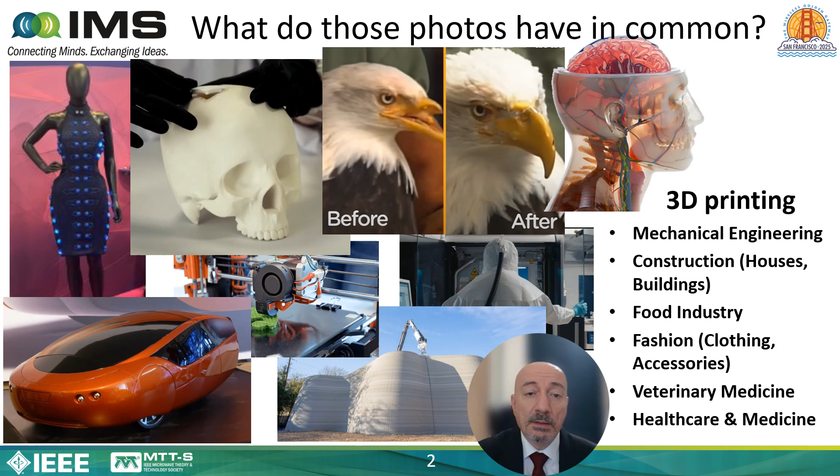Here you can see how many applications of additive manufacturing we can have. It has been used in a wide range of fields, including mechanical engineering, construction of houses, the food industry, fashion, clothing, accessories, veterinary medicine, and medicine for humans.

Of course, in this presentation we are interested in the application to microwave components. It is clear that this technology was not properly born for this area, so we have to understand how to exploit this technology for microwave components.

During this presentation, we will see the importance of selecting the right additive manufacturing technology according to the application, because there are so many different additive manufacturing technologies that it is important to select the best one in our case.

I will also show the importance of an additive manufacturing oriented design, because despite this technology allowing a wide variety of shapes, it doesn't allow all possible shapes. So it is better to have in mind the technology we will be using for manufacturing during the design.

We will also see the importance of post-processing. We will look at two different additive manufacturing technologies in particular: stereolithography, which produces plastic objects, and selective laser melting, which instead produces metal objects directly.

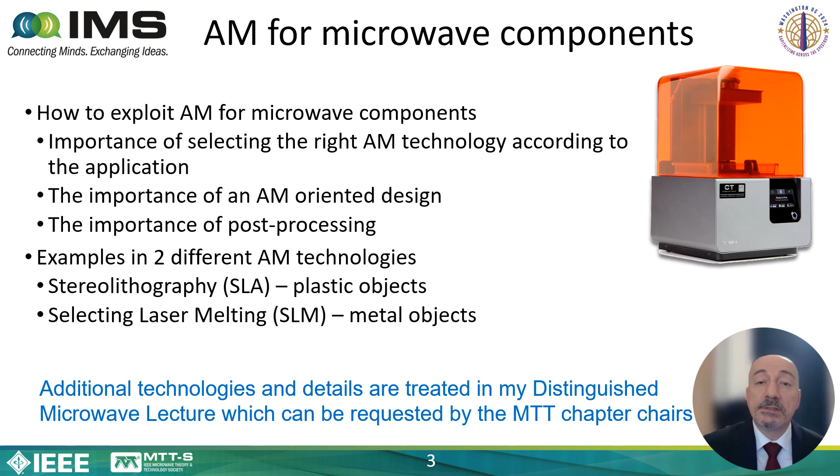But what is the main difference between additive manufacturing technologies and classical subtractive technologies, such as the traditional drilling technique? In this case, we have a block of material and we remove part of the material by using a drill in order to obtain the desired shape.

In additive manufacturing, instead, we have a completely different approach because we add material in order to obtain the desired shape. We manufacture the object layer by layer.

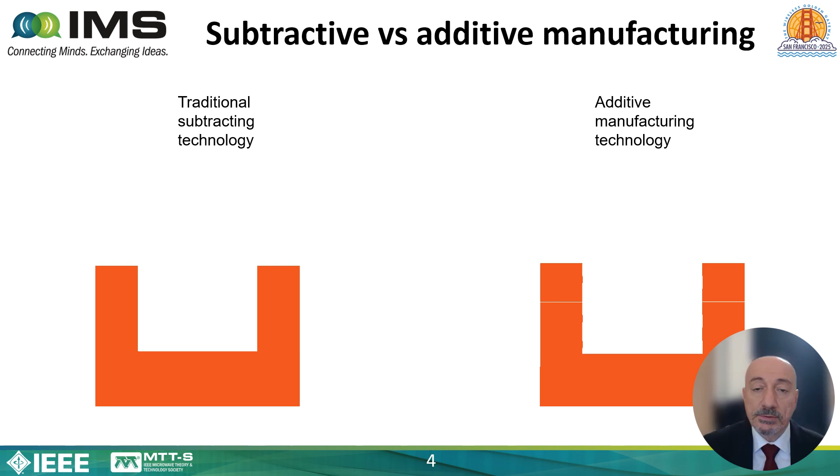We can add material by using so many different technologies. We can solidify liquids by using a laser, or we can melt powder and then solidify it in order to obtain the desired shape, and so on. So we have a lot of possibilities.

There are so many different additive manufacturing technologies that in 2010 the American Society for Testing and Materials decided to categorize all technologies into 7 categories: vat photopolymerization, material jetting, binder jetting, material extrusion, powder bed fusion, sheet lamination, and directed energy deposition.

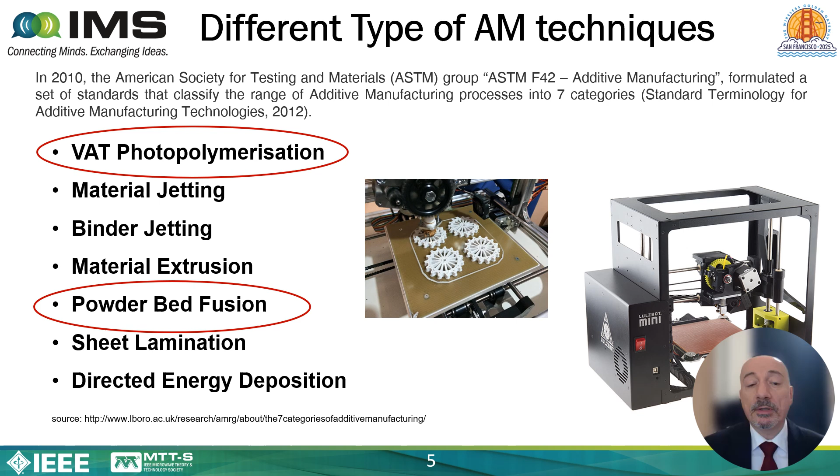This presentation is very short, so we cannot cover all of them. We will see two examples: one in vat photopolymerization and the other in the powder bed fusion category. Let's start with the vat photopolymerization category.

Technologies in this category use photopolymer resin, which is cured and hardened by using an ultraviolet laser. Here we have the real machinery and here we have the scheme. This machinery consists of a vat, according to the name of the category, which contains liquid resin.

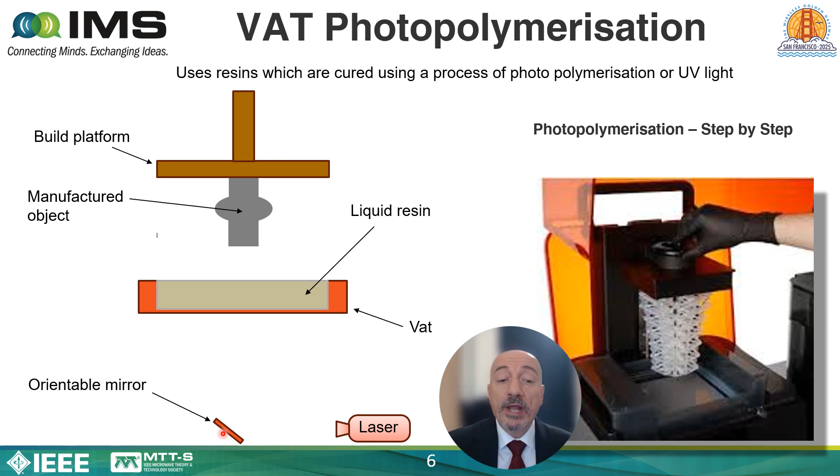Then we have the object to be manufactured, which is attached to the build platform. And then below the vat, we have an orientable mirror which redirects the laser beam.

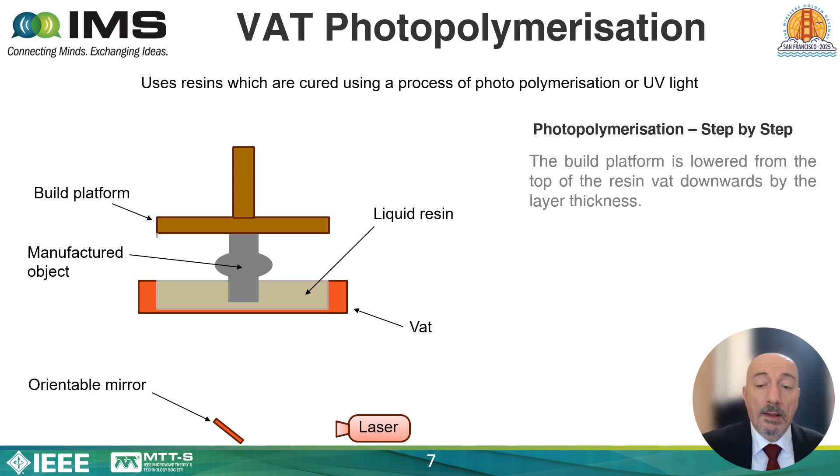Then the platform is lowered, immersing the object being manufactured in the resin until leaving a small gap with the vat. At this point, the orientable mirror redirects the laser beam to obtain the new layer of the object, which has been obtained by hardening the photopolymer resin.

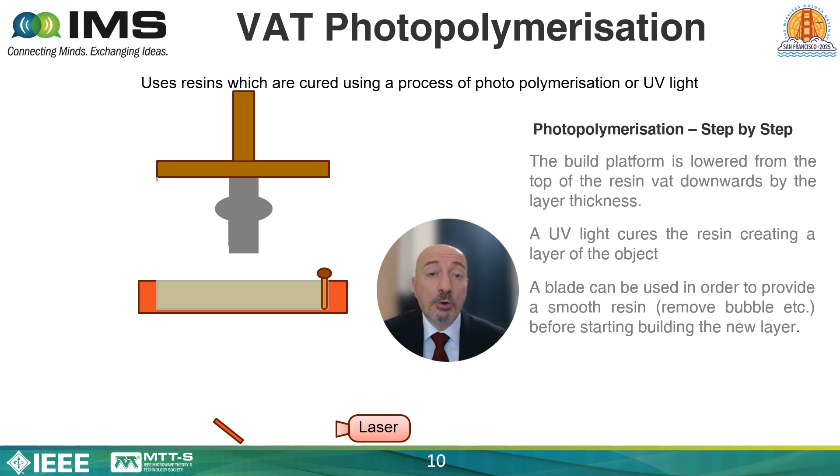After that, usually a blade is used to provide a smooth resin surface. We do this to remove any possible bubble that may have formed when we immersed the object into the resin, because we must avoid air bubbles inside the resin, as they could result in defects when the next layer is created. After that, the process is repeated layer by layer until the manufacturing is completed.

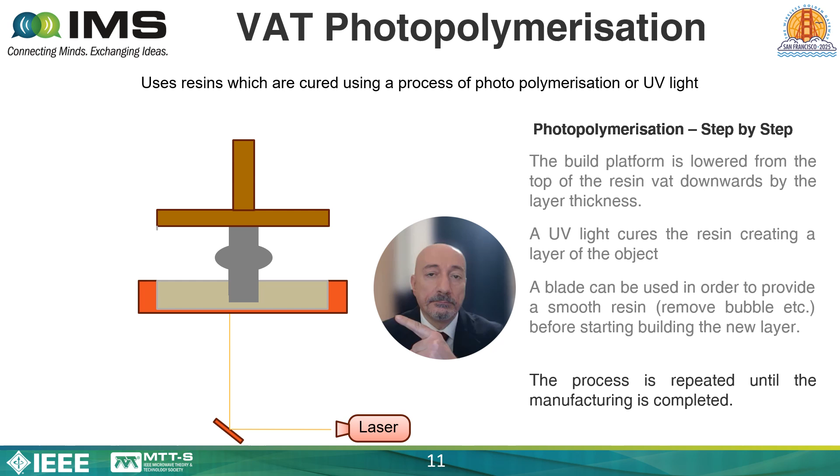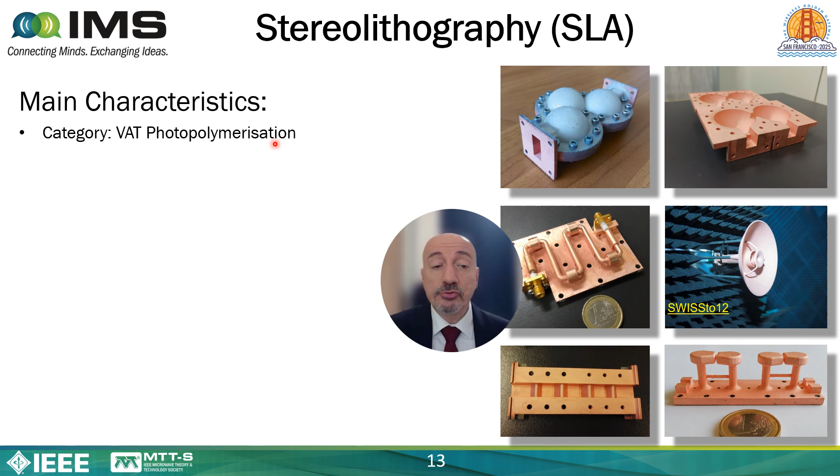Here we are adding another layer. Now let's start with the first additive manufacturing technology, the stereolithography. This technology falls in the category of vat photopolymerization. Indeed, we have a vat of liquid photopolymer resin that is hardened by using a laser.

This technology is quite versatile. Actually, all additive manufacturing technologies are quite versatile because they allow new classes of components with non-conventional geometries, like you can see here. If we want to manufacture these two components by using traditional milling techniques, you cannot manufacture them in just one step. You need more steps. Here instead you can manufacture in one shot.

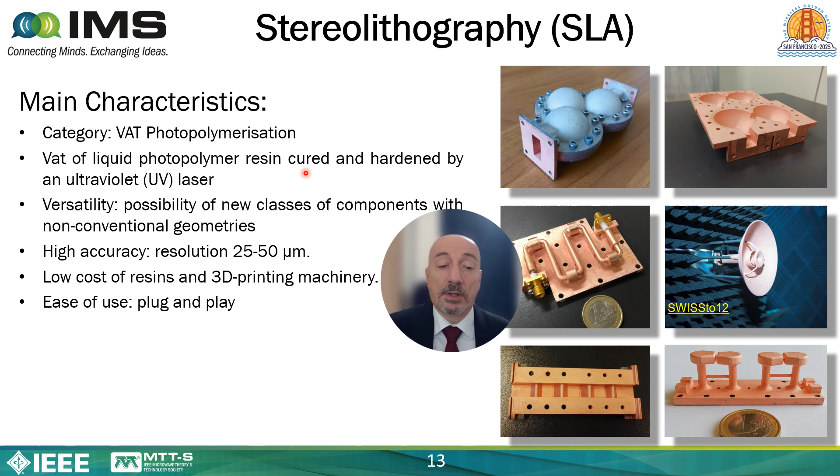The accuracy is also quite high, since its resolution ranges from 25 to 50 micrometers. It is also a low cost technology because the resin is quite cheap and the 3D printing machinery is not so expensive. You can buy a 3D printing machine for about $2,000, which is not too much, especially for a laboratory. It is also easy to use - this is plug and play, which is not common in additive manufacturing technologies.

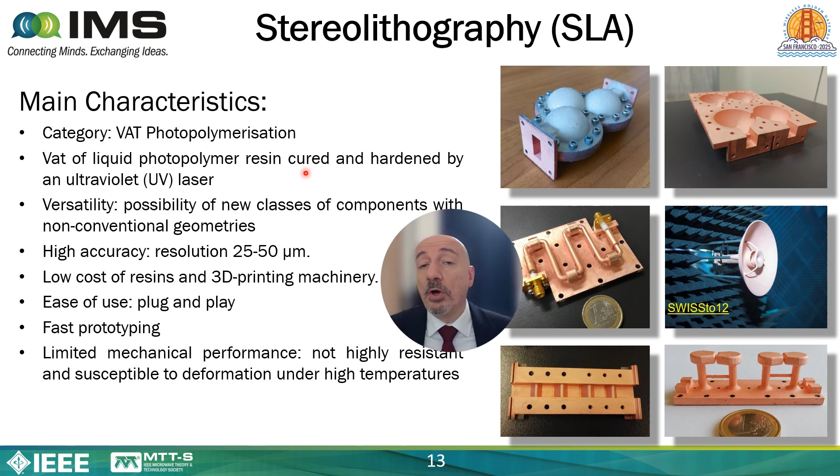It allows fast prototyping, but unfortunately we produce plastic objects. So plastic objects have limited mechanical performance. They are not highly resistant, and they are also susceptible to deformation under high temperature.

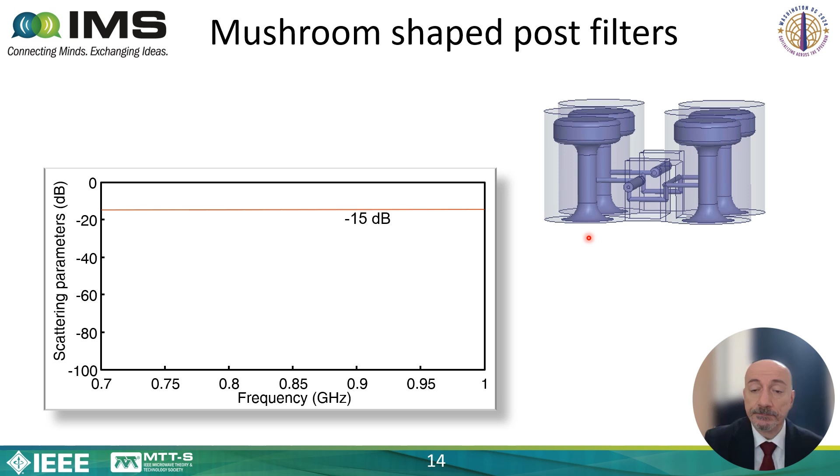I would like to show how this technology works by using this filter. This is a cavity filter loaded with mushroom-shaped posts. In addition, we have a complex wire network, as you can see here, and this network connects all the posts. This structure is not very easy to manufacture using traditional manufacturing techniques. This network is also important because, for example, if we change the height of this network, we can change the filter band.

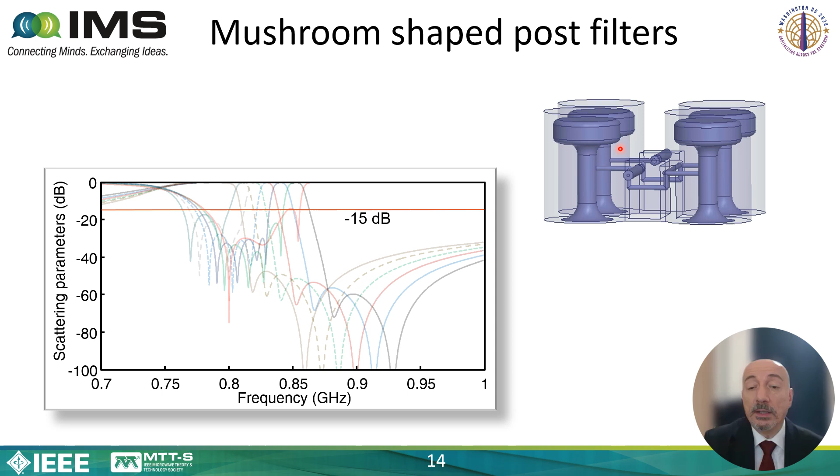But if we change this part or this part, we can also change the position of the transmission zero. And with the shape of this network, we can reshape the response. So it is very important to be quite accurate in manufacturing this part. For that reason, we select stereolithography as the technology for manufacturing.

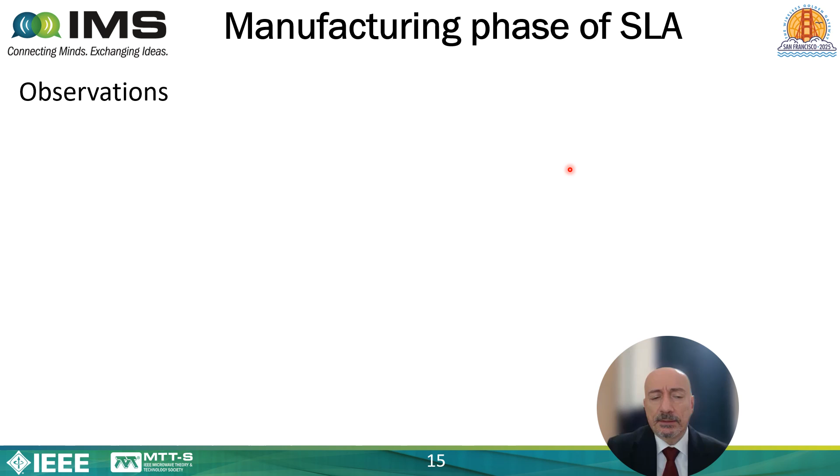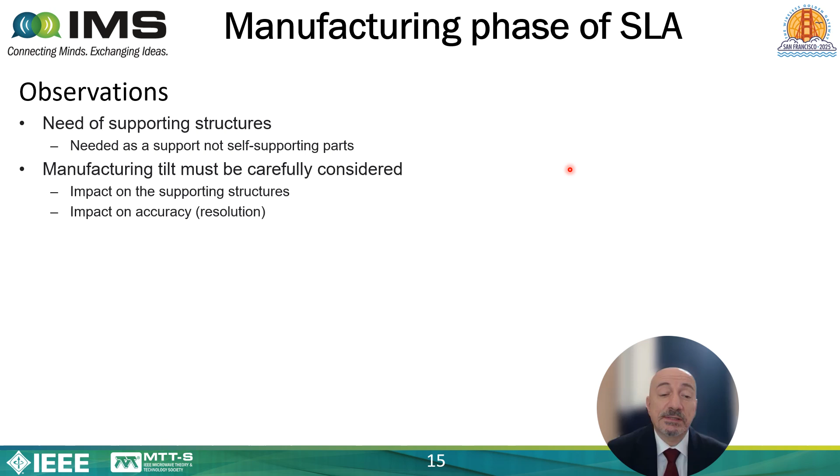Before showing how to manufacture it, let me start with some observations. First, there is the need of supporting structures in general for additive manufacturing. This is needed because there could be parts of the manufactured object that are not self-supporting - I will explain later what I mean. Another important part is the tilt during manufacturing, because this impacts the supporting structures and also impacts the accuracy, the resolution of the object. We will also see the importance of additive manufacturing oriented design.

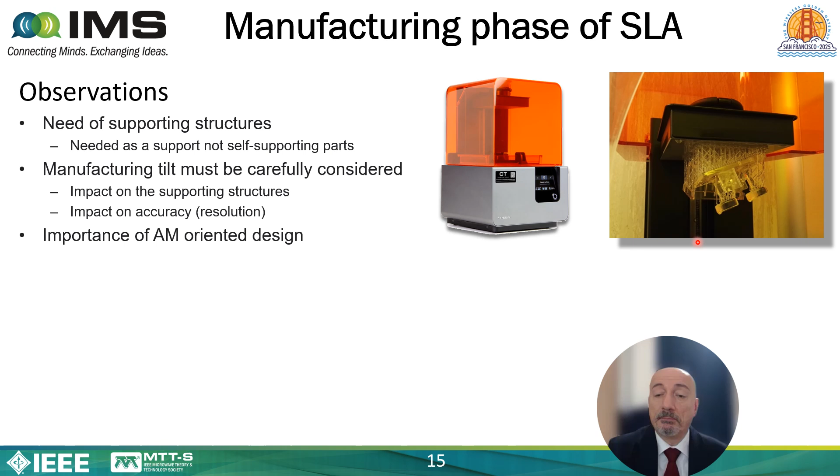This is the bottom of the filter after manufacturing. As you can see here, we have a certain tilt angle, and we selected this in order to minimize the supporting structure, the supporting structure you can see here. Of course, all those supporting structures should be removed after manufacturing.

But why do we need this supporting structure? Let's suppose we have to manufacture this layer. Consider that the manufacturing of this object starts from the top and then proceeds through the bottom. When we start manufacturing this layer, in this part we have no possibility to attach it to the previous one because there is no previous layer. For this reason, we need this holding structure to attach this layer. Of course, this is not necessary when we manufacture this layer here, because it can be completely attached to the previous one, since the previous one exists.

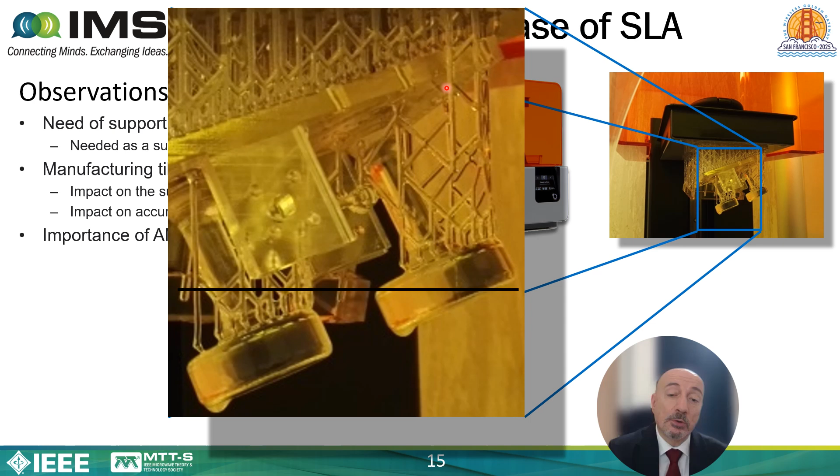I want to show you that thanks to the tilt, it is not necessary to add further holding structures here, because we can attach all this layer to the previous one. So, as you can see, this is why the selection of the tilt is very important and impacts the resolution, first of all, but also the number of holding structures.

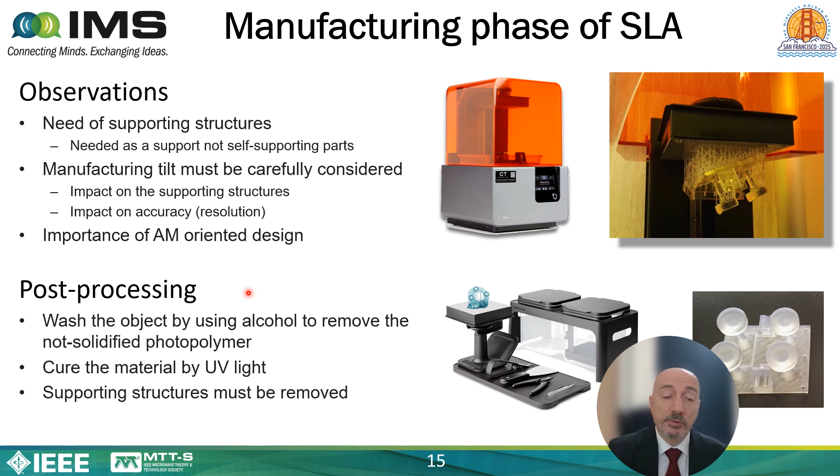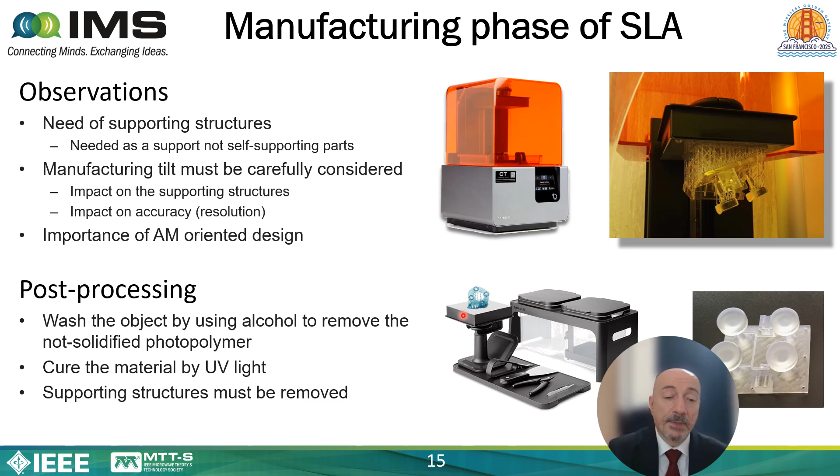With this technology, we also need some post-processing, which consists of washing the object using alcohol, because we have to remove the not-solidified photopolymer. When we finish manufacturing, there is this liquid that adheres to the manufactured object and makes it very sticky. So we have to polish and clean it, and then it is better to cure the material using ultraviolet light in order to make it harder, and then the supporting structure must be removed.

In addition to that, for our filter we have specific post-processing. This specific post-processing is for microwave applications. Let me explain it better.

The material, the plastic produced by this technology, could in theory be used as the dielectric material, but unfortunately the loss tangent is quite high. So if you use it as the dielectric material, you have a lot of losses, and usually this is undesired.

When you are working with microwave components, instead of using it as the dielectric material, we use this just as a support for the metallization in order to shape the metal. Our filter is considered in metal, so this means we need to metallize the surface of this plastic.

To do that, we use electroplating. The electroplating consists of two steps, at least as we implemented it. In step one, we spray the surface with silver paint to make it conductive, because otherwise the electroplating doesn't work. But once the surface is conductive, you can electroplate it.

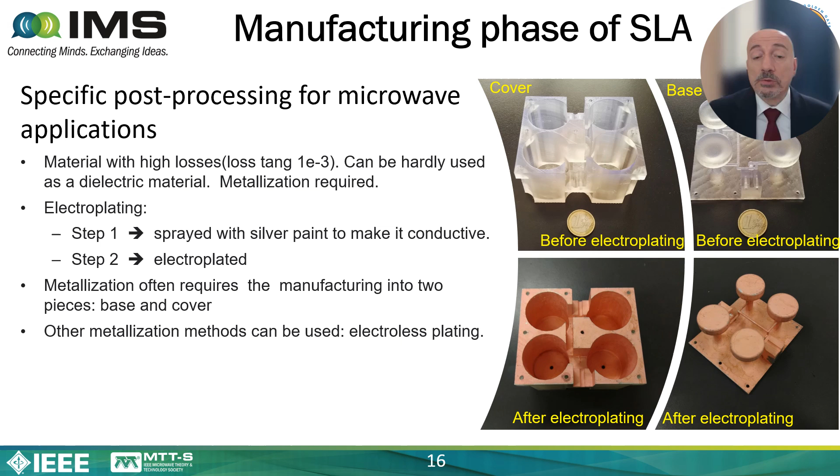Of course, other metallization methods are also possible, for example electroless plating. In this case, by using electroless plating, you can also obtain monolithic manufacturing. That would be very interesting because monolithic manufacturing has so many advantages.

You don't have to screw the parts together after manufacturing, you make it lighter, and you don't need to assemble and risk higher losses, because the ohmic contact when you join two parts is not so good. So there are a lot of advantages to monolithic manufacturing.

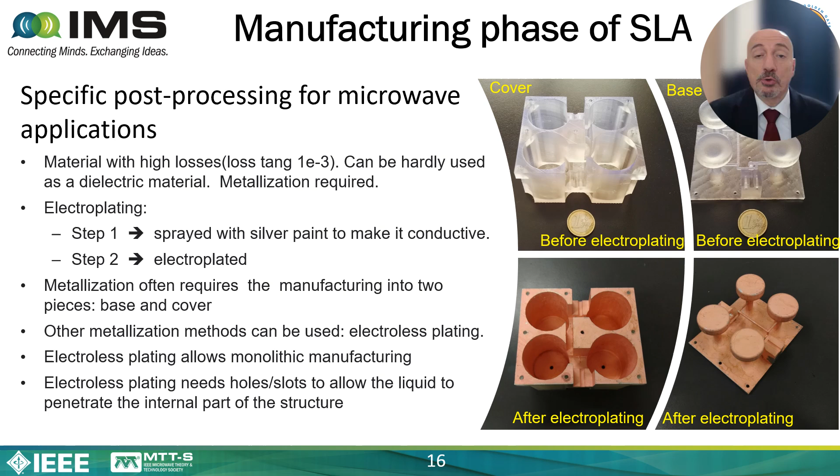This is in part possible by using electroless plating, but unfortunately electroless plating needs holes in the structure in any case, to allow the liquid to penetrate the internal part. This is a disadvantage. So there are some advantages but also disadvantages, because through this aperture you can also have leakage.

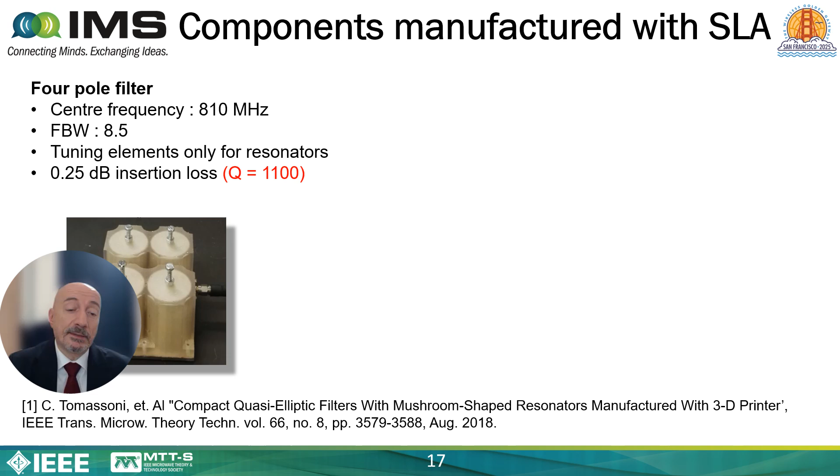What I want to point out is that thanks to the non-conventional geometry, this filter is quite small, and we also have a transmission zero that can be easily controlled. This is obtained thanks to the versatility of this technology.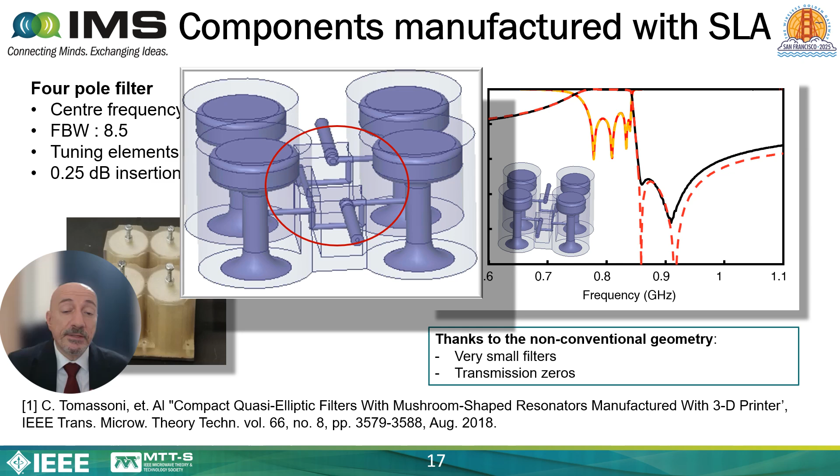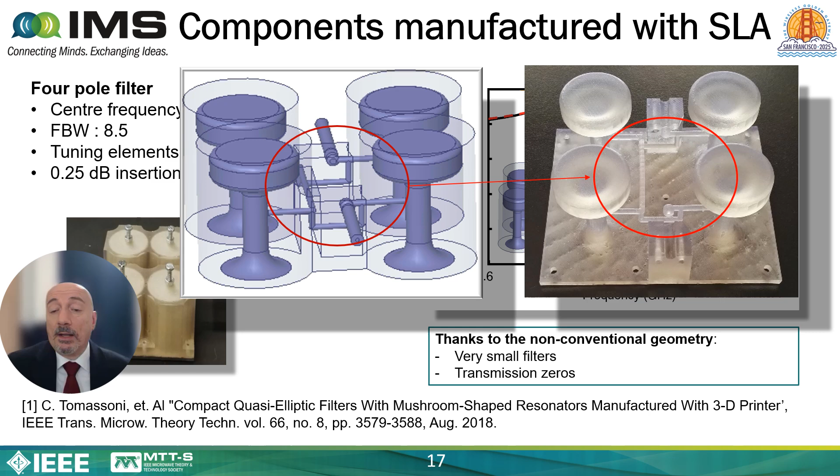This is the complex structure we have to manufacture, and this part, as you can see here, has been manufactured in only one shot. This is very important, because if you were using a traditional technology for manufacturing this filter, for example drilling, it would be impossible to manufacture this in one shot.

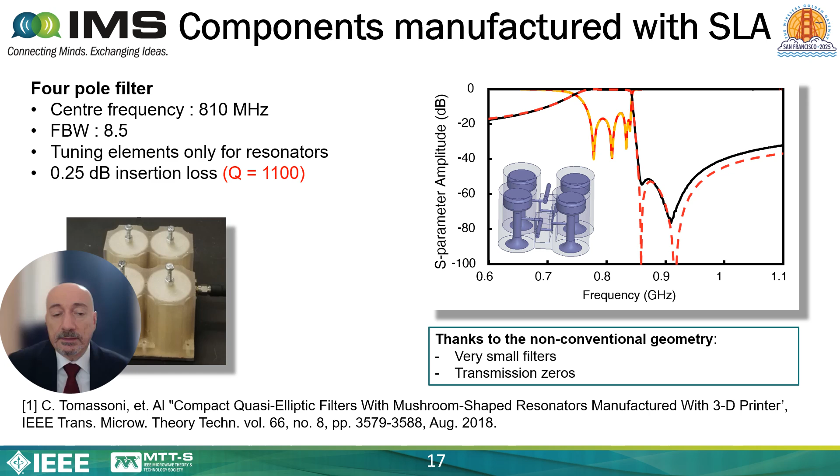You would have to start with the base, then add all the posts, and then attach this complex network. In the end, it is much more difficult, and there are problems with accuracy. So in this case, this technology allows for a lot of advantages.

I would also like to show you this Magic-T manufactured by using SLA. This is not from my group, this is from another group, and you can see more details in this paper. What I want to show here is that this structure is obtained by using electroless nickel plating, and indeed they were able to manufacture it monolithically.

This is very interesting, but unfortunately, in order to allow the liquid to go inside the structure and allow the metallization, they had to put a lot of slots in these waveguides, as you can see.

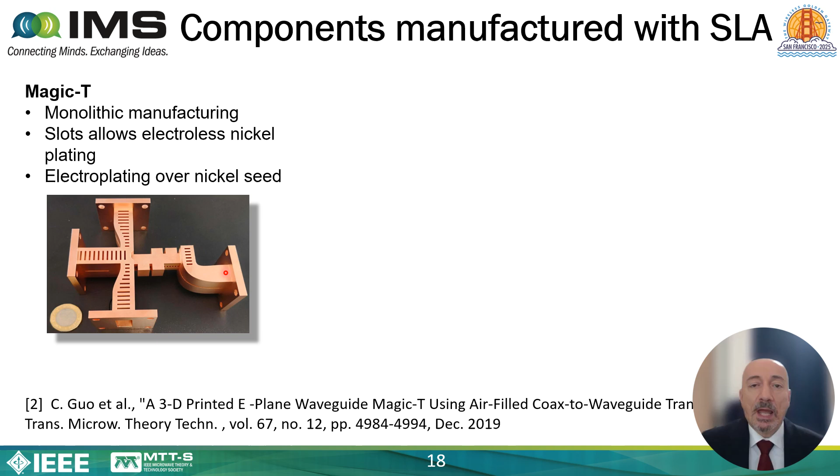And this is a disadvantage. So you have the advantage of a monolithic structure, but at the same time you have the disadvantage of slots.

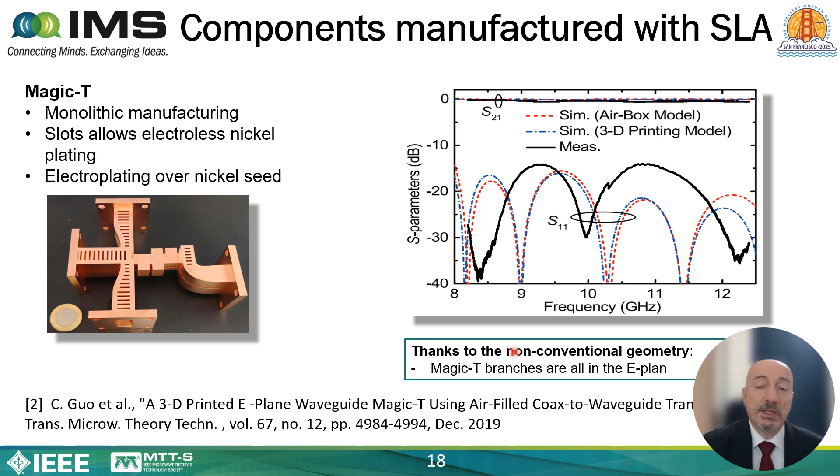Okay, this is the results, but in our case it is not important. I can also point out that this is a non-conventional geometry for Magic-T, and also in this case they take advantage of the flexibility of the stereolithography technology.

And now let me introduce another category of additive manufacturing technologies, the powder bed fusion.

In this case, we use a laser or an electron beam to melt and fuse material powder together. It is possible also to use an electron beam, but for our application it is better to use a laser because usually the object is much more accurate when we manufacture it by using a laser.

How does this category of technologies work? In general, we have a powder bed, as you can see here. The powder bed in the real machinery goes here.

Now there is no powder actually, but it goes here. And then the manufactured object is buried inside this powder bed.

Then we have a platform. You can see here the platform. This one is the platform in the real machinery. And then above this, we have an orientable mirror that redirects the laser beam.

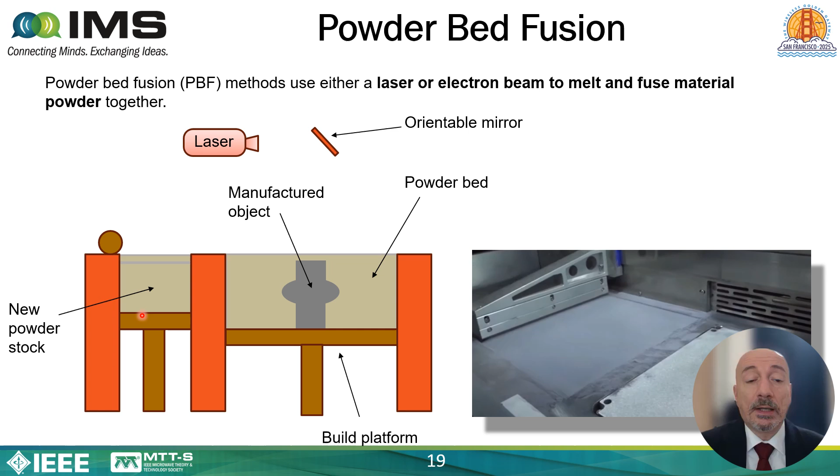Finally, we have also a so-called new powder stock and a powder roller. The new layer of the object is generated by selectively melting the small layer of powder above the object.

Of course, the powder is melted by the high-power laser, and then the new powder platform is raised.

While the build platform is lowered, the powder roller pushes the powder to generate a new powder layer.

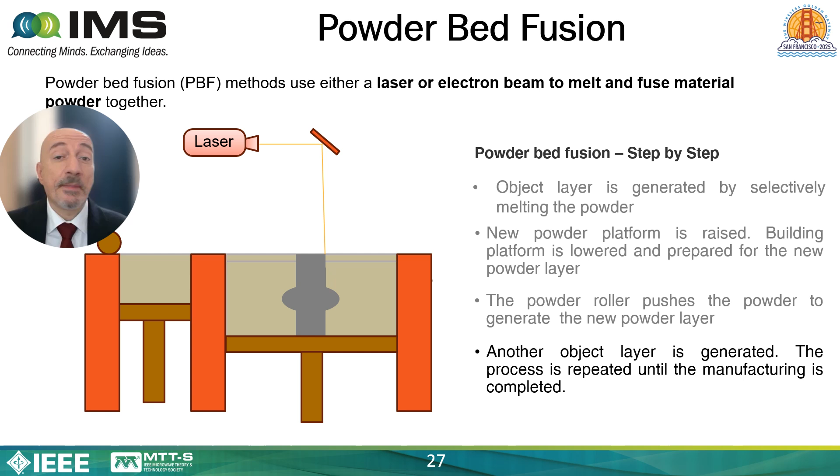And then it comes back, and we are ready again to generate a new layer. The process is then repeated layer by layer until the manufacturing is completed.

And let's now see a technology that falls in this category, in the category of powder bed fusion we just described. This is the selective laser melting.

In this case, we have a metal powder and a laser to melt and fuse the material powder together. This means that we obtain directly a metallic object, and this results in high mechanical performances.

And we also can manufacture it monolithically, and this is another great advantage because in this case, we don't need to manufacture the object in two halves because we don't need to metallize the internal part.

So we can manufacture directly monolithically, and this is an advantage from the point of view of the weight of this object, because if you manufacture in two different parts, then you have to assemble them together, and you need flanges, screws, and this increases the weight of this object.

And then when you attach two metallic parts together, you also risk that ohmic losses increase the losses of the components. So this is really an advantage, the monolithic manufacturing.

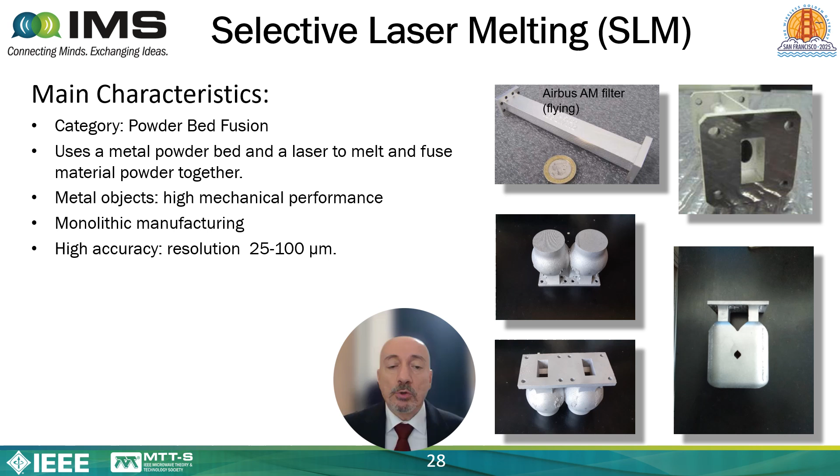The accuracy of this technology is quite high, by the way, because the resolution ranges from 25 to 100 micrometers. Unfortunately, the cost is relatively high.

And it is not plug and play, so you need an expert operator. Indeed, several parameters must be set on the machinery. For example, you have to select the power of the laser.

If you use too high power, you risk creating a large fuse spot, and this results in poor resolution. If the power is not enough, instead, the powder particles stick to each other without fusing.

This results in a fragile component and a component with higher losses. So there are a lot of things to be said, and by the way, the metal powder is also dangerous.

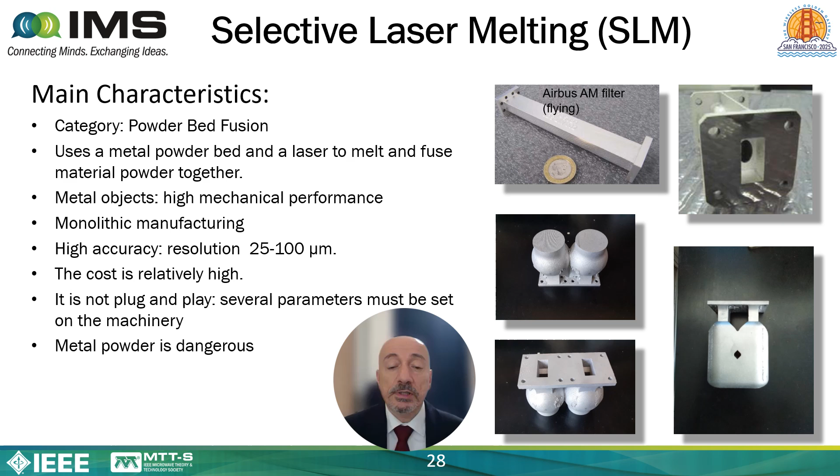The metal powder is very fine, and it may explode. It is also dangerous because it can be inhaled, and it is dangerous for the health. That's why the operator wears this strange suit in order to avoid inhaling the metal powder.

This is a video courtesy of Swissto12, a company that works in this area with which I'm collaborating. And as you can see here from this video...

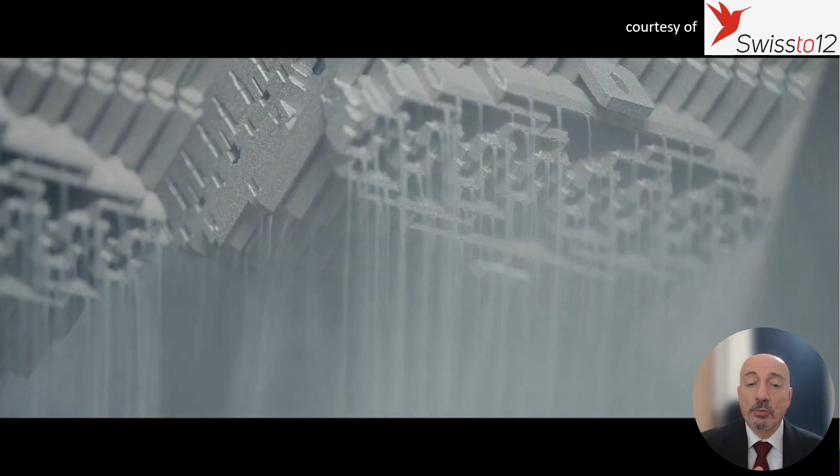The laser creates the object from the powder bed. This is accelerated, of course, and then you have to remove the objects from the powder bed to clean it better.

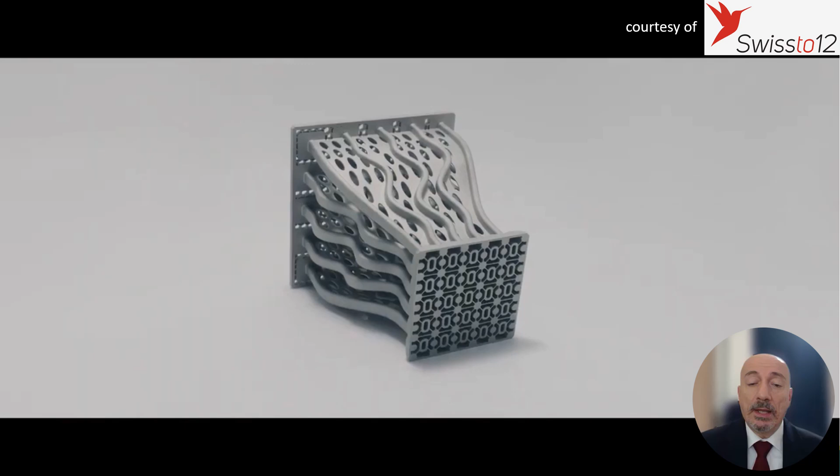But at the end, what you obtain is a complex component that is monolithically manufactured. So this is a big advantage, of course.

Spherical filters are not a novelty, but here the novelty is that we use a high order mode, and this means that we use that in order to strongly reduce the losses.

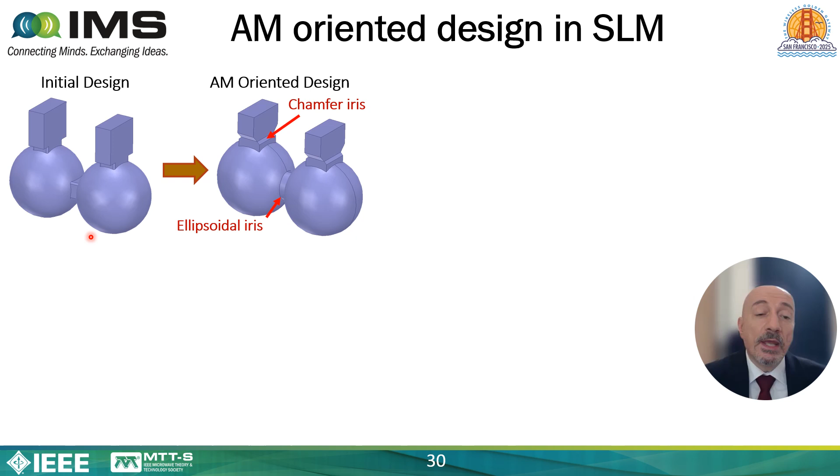By using this new shape, this is a self-holding shape, so it is not necessary to insert a holding structure inside the aperture. Here instead it is necessary to insert them in order to hold this horizontal wall. The fact that we removed the internal holding structure makes this manufacturing possible. Otherwise, it is very complicated to remove the internal structure after the filter has been manufactured.

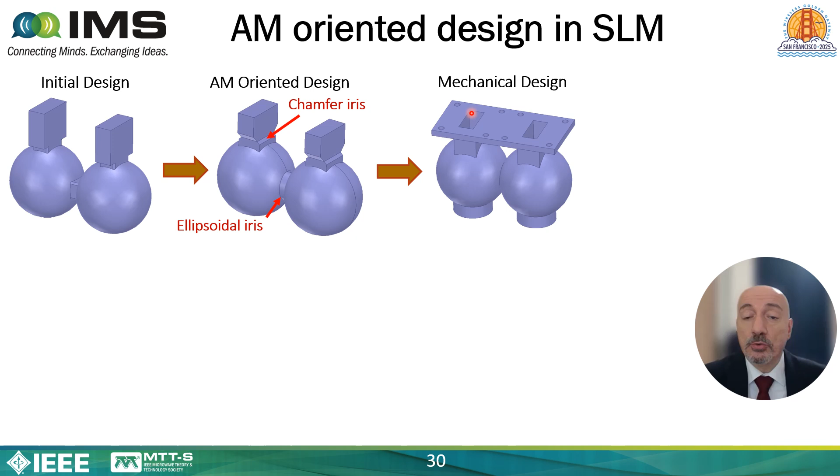The next step is to pass toward a mechanical design in which we added the flange in order to connect the filter with the input and output waveguide, and then we also added two pedestals in order to maintain this more stable during the manufacturing, which follows this direction. This is the orientation of the manufacturing.

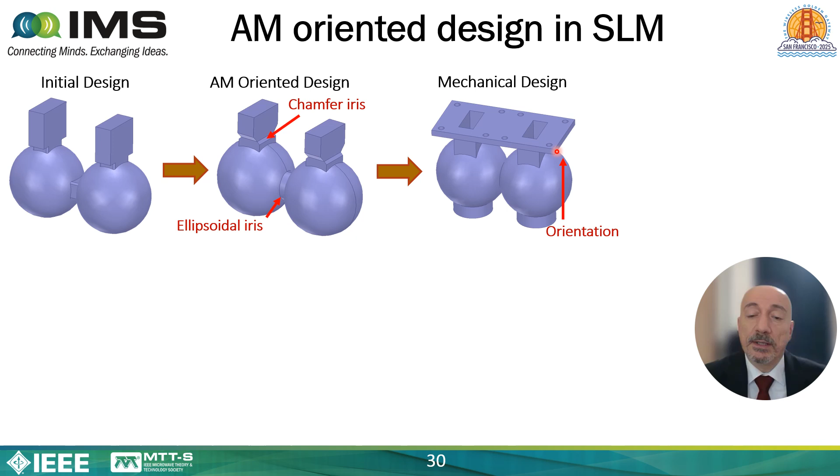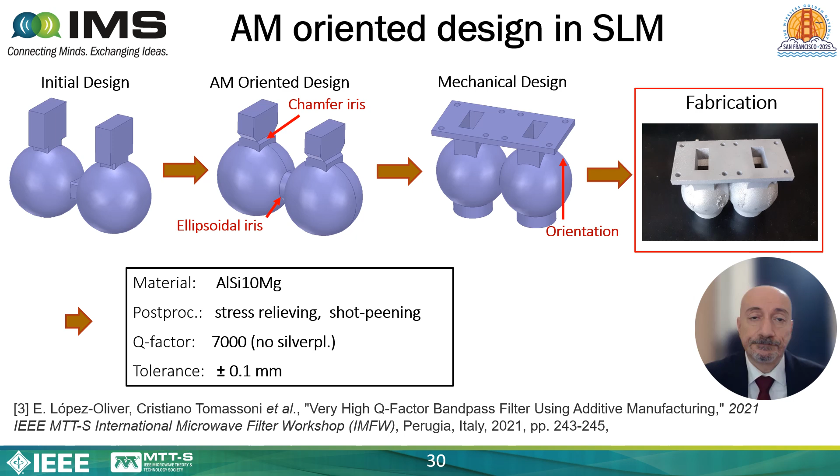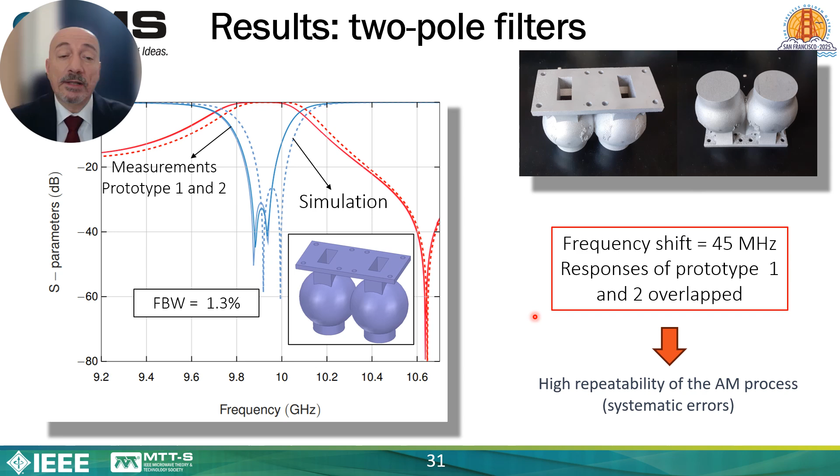This slide shows the comparison between the measured results and the simulated results. As you can see, there is a frequency shift of 45 MHz, but we manufactured two prototypes, and as you can see here, the response of the two prototypes are practically overlapped. This means that this process has a very high repeatability, and this means that this is a systematic error, and systematic errors can be easily removed.

So, to conclude, additive manufacturing is very promising for several RF to terahertz applications, including space applications. In the last year we have seen a lot of published papers which try to extend the applicability of this technology to sub-terahertz and terahertz. And by the way, in the last year there are also additive manufactured components that are already flying on satellites.

This technology also allows monolithic manufacturing. We have seen, for example, by using Selective Laser Melting, we were able to manufacture cavity filters monolithically. And consider that this is not even possible with classical CNC technology, the computer numerical control technology, such as, for example, the classical milling process.

This is very important, and this is a very good result, because in this case we are able to reduce the weight of the component, because we don't have any assembly flanges, we don't have assembling screws, and we also reduce the ohmic losses, because when you join two metal parts there are problems with the ohmic contact generally, and this creates losses. So it is better also from this point of view.

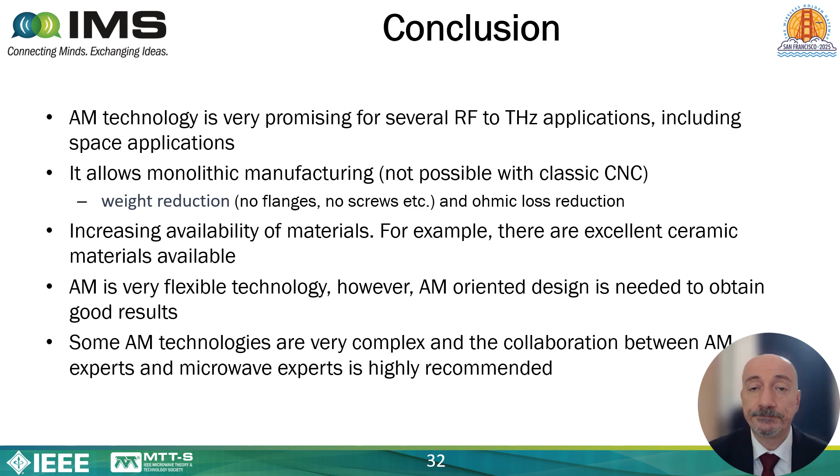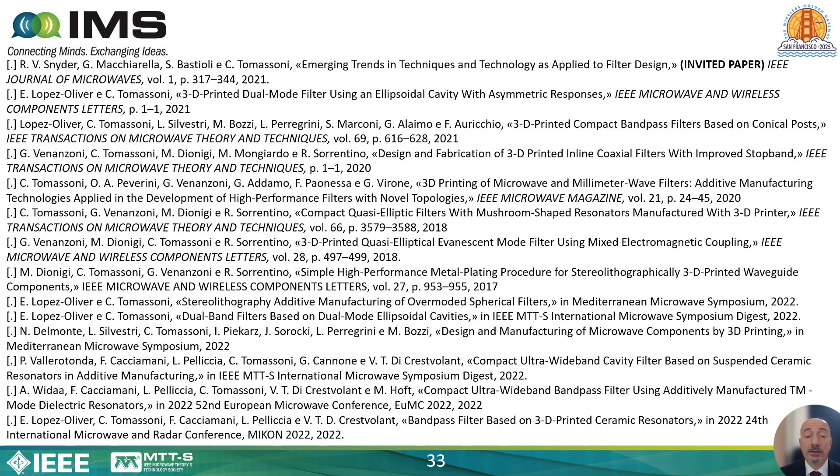Before ending this speech, I would like to leave you a couple of slides that contain references to some of my papers which I wrote in the last years on this topic. Okay, this is the first slide, and this is the second slide.

If you are interested in this topic, you can also follow my distinguished microwave lecture in which I give more details. Okay, this concludes my talk.